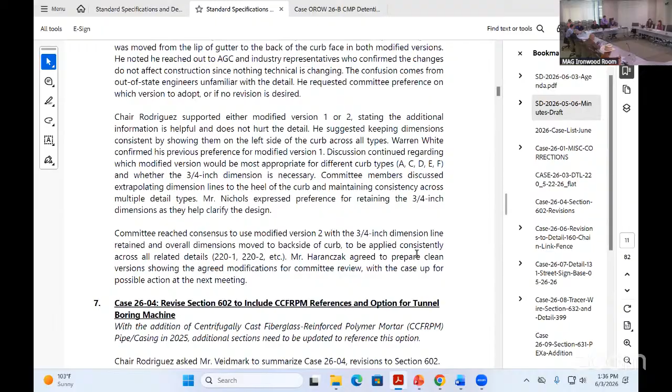All right, we'll jump right into agenda item number 3, which is going to be the approval of May 6th, 2026 meeting minutes. Gordon's going to pull those up. Hopefully everybody's had an opportunity to review the meeting minutes and any corrections they may have had, they got with Gordon. If not, now's the time to do it. Do any of the committee members have any questions, comments, or notes to the meeting minutes? All right, hearing none, is there a motion to approve the meeting minutes as written?

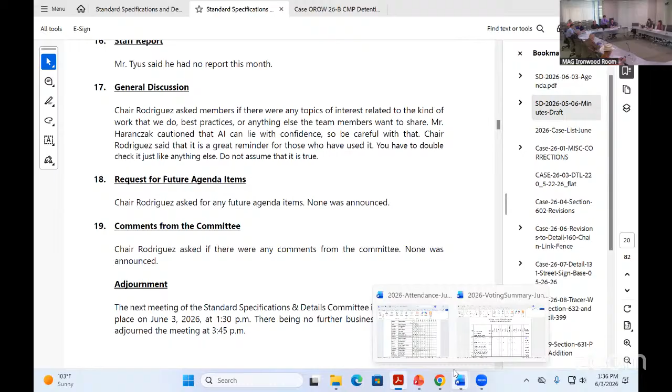This is Roy, City of Scottsdale. I motion to approve them as written. Thank you, Roy. At this time I'll take a second motion. This is Marty Robbins from MCDOT. I'll second the motion. Thank you, Marty. I appreciate that. With that, we'll move into a roll call vote.

Thank you, Chair. Let's just roll right down the list here, starting with ADOT, Avondale. Rob, are you filling in for Jim today? Yes, can you hear me now? Yes. Okay, yes, I'm filling in for Jim. Thank you. And as far as the minutes, do you approve the minutes? Yes. Okay, thank you. Buckeye? I think Buckeye is not here. Chandler? Yes. Thank you. El Mirage, yes.

Florence, Gilbert, yes. Glendale, yes. Goodyear, yes. Maricopa County, yes. Mesa, yes. Peoria, yes. Phoenix. Miguel, do you want to cover for Jose? Scottsdale, yes. Surprise, yes. Tempe, Tolleson, or Youngtown. I don't think any of them are online. So otherwise, looks like the motion passes unanimously. Thank you, Gordon. Miguel, are you covering for Jose during his absence? For City of Phoenix?

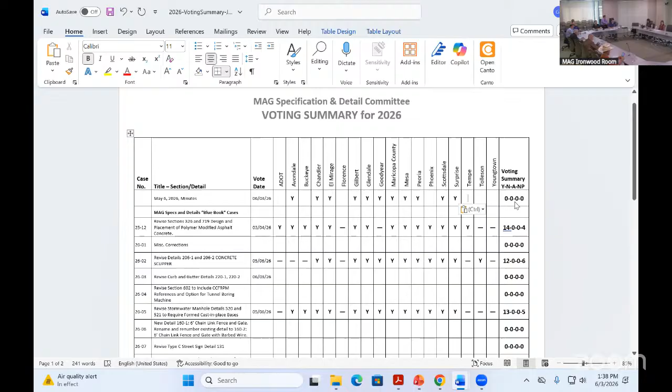We're gonna move into agenda item number 4. This is a presentation on ductile iron pipe, V-Bio polyethylene encasement and zinc coated pipe. As you know, this presentation is gonna be brought to us by the US Pipe Group. It really just includes standard recommendations and practices that are across the ductile iron pipe industry. I think that's fair to say.

And then also, as with anything, if you take anything out of this, we're looking for longevity with anything we build. And this is just to help with that longevity portion, kind of bring awareness to the group. So with that, I'll give the floor to Connor for the presentation. Thank you, Conor. Thank you very much.

Yeah, first off, thanks for having me here, of course. I'm excited to talk about this. A couple minutes about me. Been at US Pipe for about 6 years now. Before that, I was in the oil and gas industry, all focused on corrosion control, so tanks and pipeline. So got quite a bit of background in the corrosion side of things. I'm the research development manager for US Pipe. So always looking at new products, new ideas, new concepts, and anything in between.

So just jumping in, I always appreciated this slide when I first started with US Pipe. This was the first real discovery of polyethylene encasement back in 1951. And at the time, it was a bolt study. So back when we had mechanical joints before the push-on joint, there was a lot of bolt corrosion, and DIPRA and other pipe companies were looking for solutions on the bolt side of things. And this was right when polyethylene film was first being developed through DuPont and some of the other chemical companies. And we said, well, maybe we should put some on the pipe and see how it works.

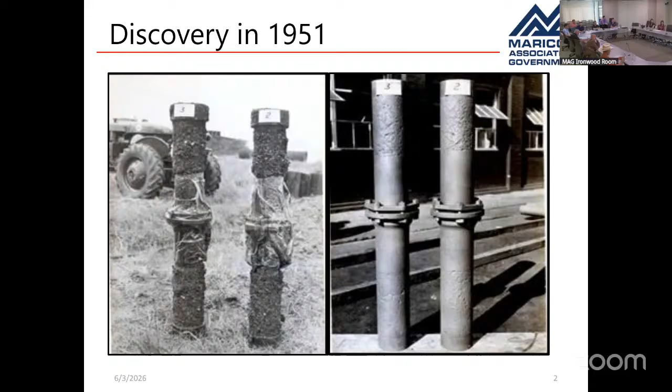And really clearly from the picture, it wasn't just the bolts that it protected, but a big portion of the pipe as well. You can see where the polyethylene encasement stops on the top portion and the lower portion, it prevented corrosion on the exterior. So of course, from these results, everybody got very excited. And the first commercial installation was not too far later. It was 1958 on an operating water line. And luckily, we still get to go to that water line. It's in Lafourche Parish, Louisiana. So very corrosive soils. And that water line is still active, still in service.

And DIPRA actually goes back about every 5 years or so. You can see the dates on the bottom. And they dig a new portion, excavate a new area of the line, remove the polyethylene encasement, make sure the line is intact. They sound the pipe to make sure there's no external corrosion. I actually got to take these pictures back in 2021. And then I believe 2026 is coming up. We might end up being in 2027, but that's out of my control.

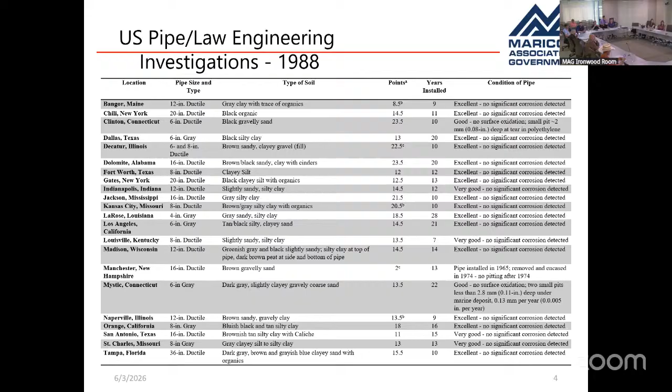So of course, from there, this is US Pipe. We went around the United States and looked at different active water lines that had polyethylene encasement wrapped around the pipe, and hired an independent engineering firm. And in all of the cases, the pipe looks excellent. This was done in the late 80s. There's another group in the early 90s. You can see there's some ductile, there's some gray, various locations. I'm not going to go through each and every single one. But the point being, these are all 15, 20 years at the time, and looking in great condition in very corrosive soils.

Of course, a lot of people always ask, how the heck does polyethylene encasement work? And the biggest answer is the dissolved oxygen is depleted in between the polyethylene encasement and the external surface of the pipe. And oxygen is a major driver of corrosion. As soon as the dissolved oxygen drops down, the corrosion rate follows it. So there's a paper in 2010, ASCE Pipelines, written by Schiff and Associates, who later became HDR Engineering, which a lot of us know. And that's the reference there at the bottom.

But a little bit more about that. That was a circulating water flow loop in a closed system. And there were corrosion probes on the pipe surface, as well as dissolved oxygen meters. So that's what that graph shows, the dissolved oxygen after a period of a few days dropping down to a point where there's essentially no more corrosion.

In addition to lab studies, we do a lot of field burials. So US Pipe owns a test site down in the Florida Everglades. We try to look for the most corrosive soil we could. We used to have a test site in New Jersey back in, I think, 57, which is where a lot of the infrastructure started in the Northeast. And that is now a protected wetland. So we had to buy a new site back in 2001. And we do a lot of field studies of actual pipe in the ground, mainly focused on different methods of corrosion control.

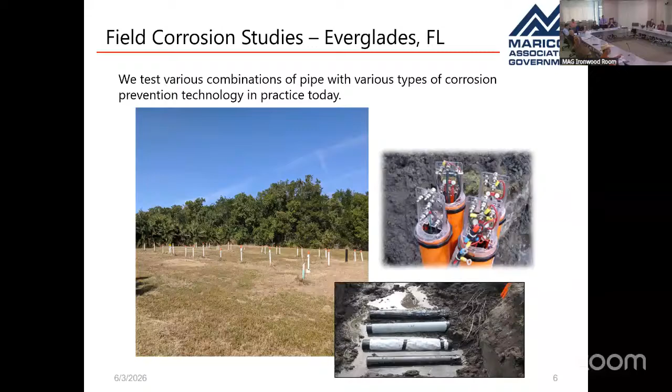You can see the test stations that are coming up out of the ground. We can do various monitoring techniques to see how they're working. So because of all that research on polyethylene encasement, we found that there could be a better polyethylene encasement. How do we make it better?

One of the major issues in some of the coastal soils can be microbiologically influenced corrosion, or MIC. It's not too common outside of coastal areas, but there are some swamplands, some bogs and things where you can find it. And it thrives in an oxygen-depleted condition. Of course, that's our major mechanism for preventing corrosion, to consume the oxygen in between the polyethylene encasement and the pipe. So there's the risk of MIC corrosion. That's why we added an antimicrobial to the film surface on the ID.

So it's a 3-layer film. There's an outer layer that has UV stabilizers in it. It's white, so it's good to see if there's any damage to the wrap as it's going into the ground. It's very visible to see the black pipe underneath the contrasting white. Then the intermediate layer is a 6 mil thick polyethylene, and then you have the inner layer that has the additives, an antimicrobial and a corrosion inhibitor.

This product is available. It's not proprietary to any manufacturer, and it meets all the requirements. AWWA C105 is the standard for polyethylene encasement, so all of the physical performance and physical properties of the product are in there.

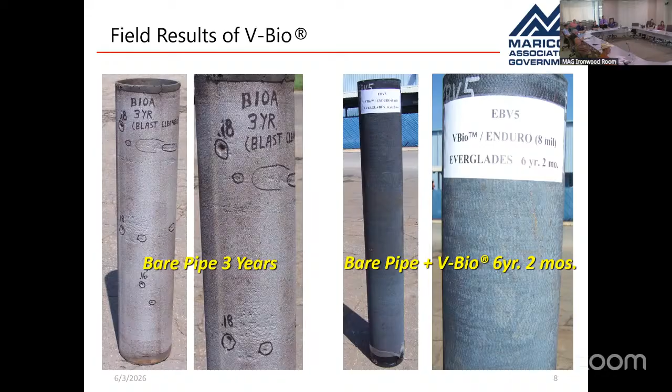Here's a great example of how it does work. We've got bare pipe on the left, 3 years. It says 0.18. There are some other penetrations, but that's about 3 years in Everglades soil. So we can get a hole in a 1/4-inch wall pipe pretty quickly, which is unfortunate, and that's what we're trying to prevent and stop. There's VBio on the right. At the time it was 6 years, and we still have a whole bunch of pipe and examples of it.

In addition to VBio, out of all those corrosion test site studies, we also evaluated zinc coatings. Zinc coatings have been used for a relatively long time. We started, I think, in the 80s, and the ductile iron or cast iron pipe manufacturers in Europe were using zinc a lot earlier than we were. What we found is the combination of the two, zinc and VBio, or zinc and polyethylene encasement, works tremendously well. I got to take these pictures a few years ago; this is 10-year-old pipe down in the Florida Everglades.

We also do intentional damage to the polyethylene encasement to simulate a contractor's unrepaired damage of the poly wrap. And you can see in the pictures below there's no corrosion. That's 10.5 years of that pipe being in the ground.

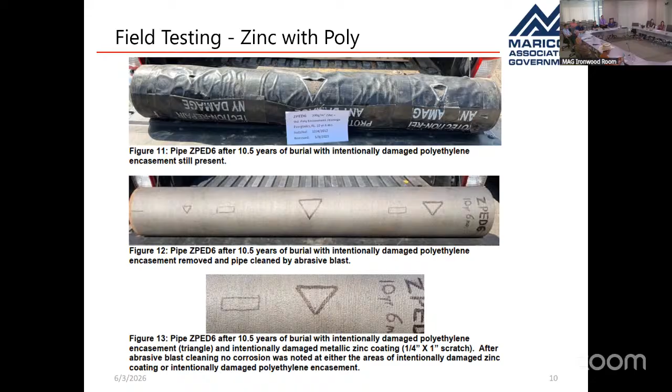In summary, we presented at AMPP, the Association for Materials Protection and Performance. It used to be NACE, the National Association of Corrosion Engineers, which is the national and international organization that has all standards related to corrosion control. They're the go-to source. We presented, I think last year, maybe 2 years ago now, a very large data set from a whole bunch of pipe.

So not quite in conclusion, but a summary of zinc and VBio, just to really drive it home. We always recommend VBio or polyethylene encasement with zinc. We never recommend zinc pipe alone. We found the combination of the two is really the best bang for the buck.

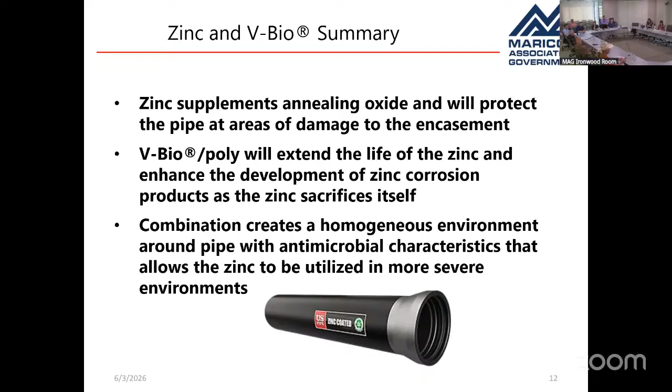Back in, I want to say the early 2000s, DIPRA and Corpro, DIPRA is the Ductile Iron Pipe Research Association, came together and put a lot of data together to come up with recommendations for corrosion control of ductile iron pipe. It went back and forth for maybe 5 years. It was proprietary to Corpro for a few years. And then I want to say in 2014 or so, they released it to the public. So anybody can use this. It's on their website. And it really is a risk-based approach to corrosion control.

So there's a consequence and a likelihood. So those are kind of the two factors. When you get consequence, we have thoughts of, how big is the pipe? How deep is the pipe buried? Is there alternate water supplies, or is this just a single line, feeding a hospital of some sorts, right? So that's where a consequence would get a higher point count. And then the likelihood side is more related to the soil, right? That's what we're concerned about, is aggressive soils. And there's point counts on that as well.

I'm not going to go through each and every parameter here. I only have a few more minutes. But one of the main points would be soil resistivity. It's one of the major factors or parameters of soil that we look for to determine if it's corrosive or not. So you can see on the right, there's a point count there. So 30 points goes to resistivity versus some of the other factors have quite a lot less point count. And you take soil samples along the right of way, or maybe there's some historic data, and it can give you a great indication about how aggressive the soil is.

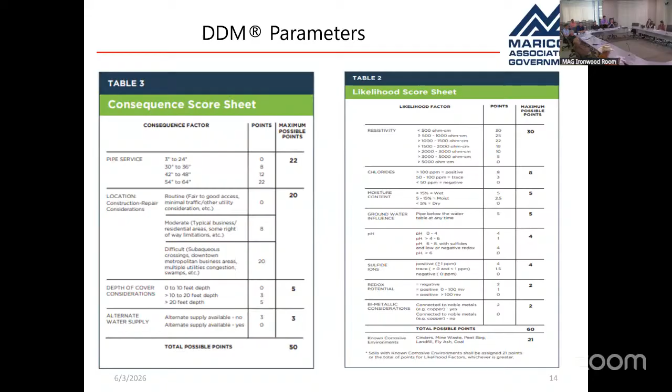And then from there, you add up all your parameters, add up all your points, and you wind up somewhere on this chart. So there's 5 categories here. I tend to look at it as 3. But number 1, being standard pipe, we know that not all soil is corrosive. We know that we have ductile iron in the ground for decades and decades. We know we've got gray iron in the ground for over 100 years, over 150 years. So there's quite a lot of evidence to support that not all soil is corrosive to ductile iron.

As you move on, we go into number 2, which would be VBio. The DDM only covers VBio as a recommendation. And then number 3 would be joint bonding, which is not a recommended practice for us. For me, US Pipe, there's a lot more consequences that could come with bonding the joints of ductile iron. And then 4 and 5 would be the severe categories where that's zinc and VBio in combination.

So here's the recommendations. You can see, like I said, number 1 is standard pipe. 2, we have VBio. Number 3 is VBio with joint bonds as a possibility, as an option. And then we have 4 and 5, which are very similar in my mind. We're actually talking about combining those two sections just because they're so close. The only difference on there, as you can see, is a product called Life Extension Cathodic Protection. I've not seen that used in practice at all anywhere. So we're probably going to scratch that off. But for now, that's what the recommendations are.

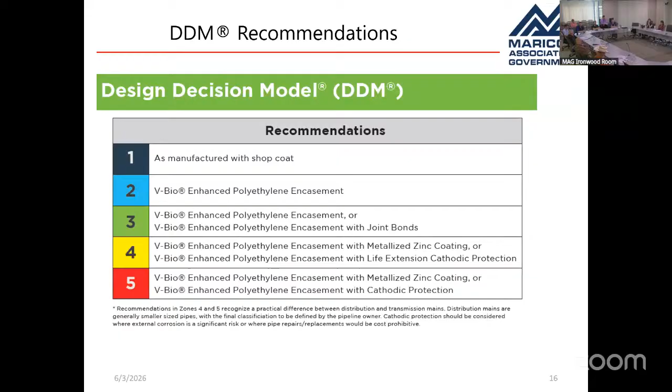There's quite a lot of content there, but I appreciate the time. So any questions, please. Thank you, Conor. I think it's helpful for a lot of us that use ductile iron pipe, Glendale included. Obviously this presentation, although US Pipe would prefer, it's not to persuade anybody from one product to the other. It's more to give us an understanding, those that use ductile iron pipe, on what the different methods are. And the DDM, I think, is a great tool.

And that's available where? On DIPRA's website? Yes, it's on DIPRA's website. I want to say all the pipe manufacturers probably have it on their website as well. But I think a simple Google search of design decision model or DIPRA, but it's definitely on DIPRA's website.

Absolutely. One of the good things we have going for us is the majority of our pipe in the valley is bedded in ABC, more of an inert material. That's helpful. Doesn't necessarily always help with the electrolysis if we have something that's not wrapped properly, which we crossed that bridge last year with the wrap and tap detail. But corrosion protection is always a concern, especially for us because we use so much DIP and we have so much in the ground. When we replace transite, we replace it with DIP.

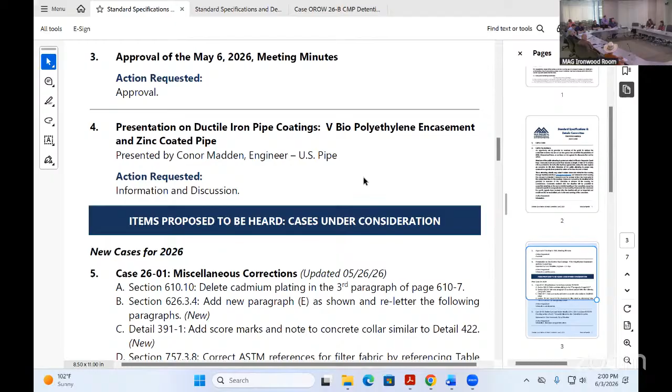Anybody else, any other committee members have any questions for the US Pipe Group? So, all right, well, I will end this with, I've dug up and witnessed what happens when pipe's not polywrapped properly and it leaks. We have a lot of it in the ground. We'll continue using polywrap without testing soil and with testing soil. So it's still a BMP for us, or a best management practice. And I would encourage others to consider it.

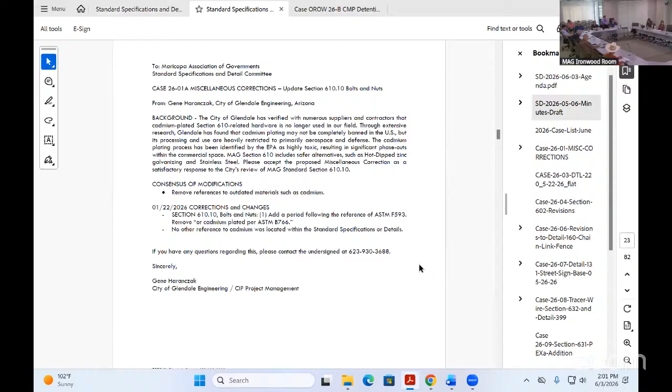All right, moving into items proposed to be heard and cases under consideration. This is new cases for 2026, agenda item number 5. Case 26-01 is the miscellaneous corrections. We have one existing one that was A for the cadmium bolt plating, but then there's a couple new ones. We have B, C, and D. I haven't had a chance to go over B, C, and D, but who brought B to our attention?

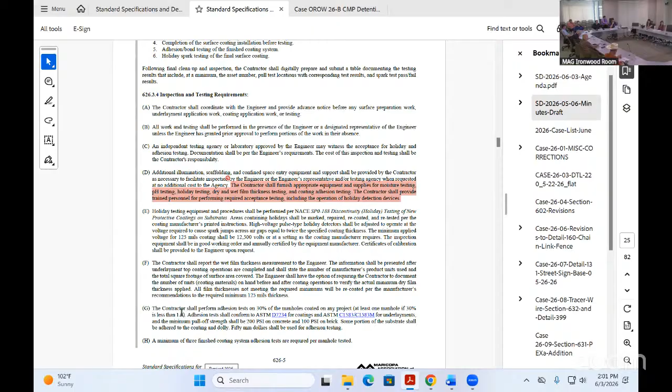This is Gordon, but the case was brought to our attention from Phoenix, from Rob, who basically just noticed as he was going through their supplements that on their supplement, and this is a section that was based on the Phoenix supplement, this should have had the letter E as a separate paragraph, and then the ones that follow should be relettered. So it's just a formatting issue. Okay. Thank you, Gordon. And then C?

This one was brought forward by Jim Badowich. This was discussed in the Water Sewer Working Group. And the idea is to add the score lines to the concrete collar on this detail, similar to the, I think it's 422, I can't remember exactly, the detail for the manhole cover. Yeah, I know we've been going through and correcting a lot of those and adding them. These are across multiple details. Thank you, Gordon. And the last one for D.

This last one, I noticed as I was going through the spec that a couple of these ASTMs were out of date or incorrect. And I brought this to the attention of our outside right-of-way group. And I think Peter can give an update on his research. Thank you, Gordon. The existing section for landscaping identified a specific set of designations for basically the filter fabric to be utilized. We already had filter fabric requirements in section 796. So upon discussion with the group, we decided, why don't we just reference the table in 796 and avoid duplicating requirements for filter fabric. It was already in the standards.

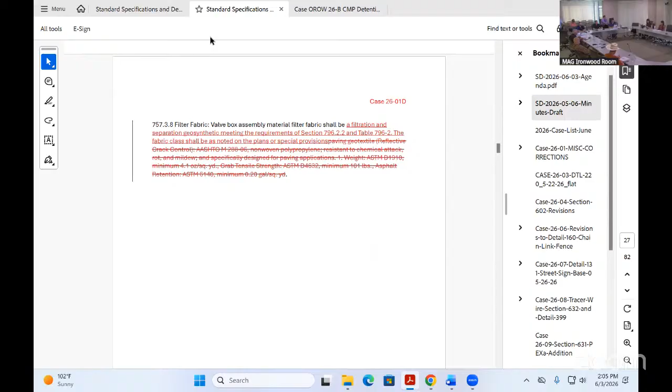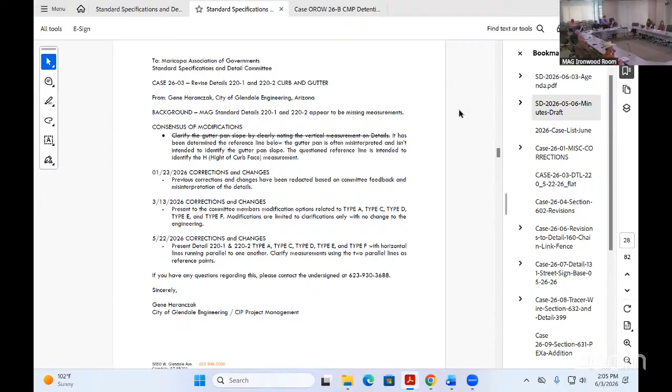All right, we'll move into agenda item number 6. This is case 26-03, revised curb and gutter details 220-1, 220-2. So the latest and greatest came out last month on the 22nd, and this was just to present the details, type A, type C, type D, type E, and type F, with the horizontal lines running parallel to one another, and clarify the measurements using those parallel lines as reference points. Nothing technical has changed on this drawing other than clarifying the notes and or clarifying the measurements and moving them into different locations.

Now, where I was at with this is in the blue. The question comes in, you look at where it says remove sidewalk note question mark on the lower blue note. There's a little depiction of a very steep angled sidewalk on the back there, and it notes sidewalk. And then there was the same depiction on the upper one where it says sidewalk note was removed. So I just wanted to get an idea from the committee members whether we should just go ahead and clean that up and pull that out of there on both details. I don't see a reason for it, being that sometimes we have landscape back there, sometimes we have sidewalk. I just thought it would clean it up a little bit. But those are the updates, and with that, I'll open it up to the committee for discussion.

Mr. Vice Chair, I agree with removing the note. Okay, so it'll look a lot like the top one, without the red cloud and the blue writing. So there was a measurement that changed, and it was because it was corrected. Which one was it? I believe it was mountable curb and gutter type F. It called out 1 inch where the red line is, and it called out 1.25 inches on the bottom. But the trouble with that was that if both lines are perfectly parallel to each other, by default, if it's 1.25 inches on the bottom, it's gonna be 1.25 inches on the top.

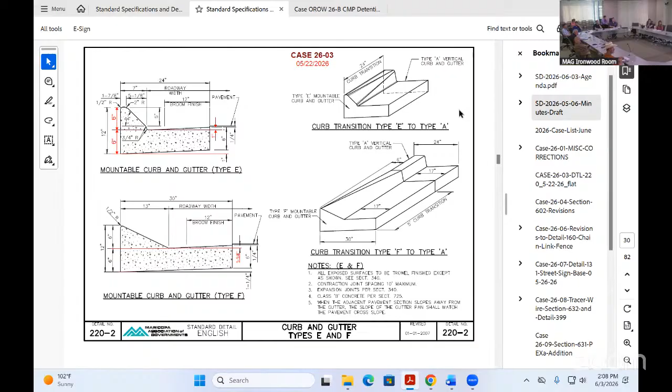But I think the confusion came in because that red line that's drawn through type F, the upper parallel line, was not necessarily intended to identify that measurement. That's what was causing the confusion, because it didn't go all the way through. So you didn't know where its pivot point was. You didn't know if it was perfectly parallel to the lower line. But I hope everybody's had an opportunity to look through this. I know it came in mid-month. It is up for possible action the way it's drawn right now. I'd have to remove the blue and the little red cloud. But first, let me see if any of our committee members have any questions or comments on it besides Ryan.

When you're removing the sidewalk note on type D, are you also going to be removing the dashed lines? Because those look kind of strange at that angle anyway. Yeah, they were a mirror image up on top on the upper type C. It was the same thing, and I pulled it out, and that was one of the questions I wanted answered, was should I just remove it from both?

So this is Roy from the city of Scottsdale. Would we want to do the same thing for the type B? B as in boy, ribbon curb, the call out for the parkway or sidewalk on the left? Just take that call out as well as the dashed line in the bottom there. The dash line on the bottom. Oh, I see what you're saying. Yeah, and really that parkway, I know when we do our parkways, we like to leave them recessed no more than 1 inch, which there's no measurement called out in there. But yeah, great point, Roy. Any other committee members have any questions? Anybody haven't had an opportunity to look at this detail?

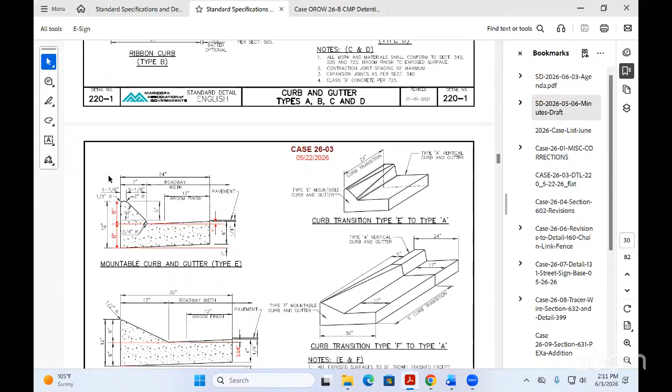Hey guys, it's Rob Godwin for Jim. Just want to bring something up. You may be aware some contractors this past year are starting to pour integral; we've got integral curb, gutter, sidewalk with the roll curb. Now they're doing it with vertical curb. So now we've got monolithic vertical curb and sidewalk.

I don't know if that's a place to have a note here or not, or that should be a different detail at some point, but when you have the sidewalk drawn the way it is, you're looking at 4 inches thick. But when it's poured monolithically, it's more like 6 inches thick, and it tapers up to 4 inches. Well, I guess my question would be, is that a problem or a concern? Are you guys seeing any warranty issues or any premature failure due to that?

No, I mean, personally, I think it's better to do that. Streets Department doesn't like it. They've got to get bigger saws where they've got to cut out the sidewalk portion. But I'm just saying the way that it's drawn here, when you show sidewalk, it would be 4 inches thick if it's poured separately. If it's monolithic, it's going to be thicker.

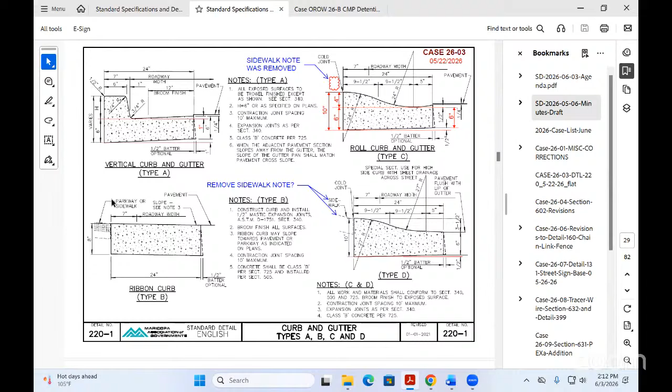Yeah, gotcha. I mean, I'm not opposed to thicker, right? Oh, sure. Right, but I'm just talking about the way that it's drawn. If you note that the sidewalk's there, it's gonna be different if it's monolithic or if it's poured separately. Well, what I already heard from two other committee members is let's just pull the reference of the sidewalk out. Yeah, that would make sense. Okay, you'd agree with that? Yeah, sure.

All right, like I said, we'll keep this up for action for next month, and I'll get a cleaned up CAD version since I'm not getting any opposition to it and getting some good positive feedback.

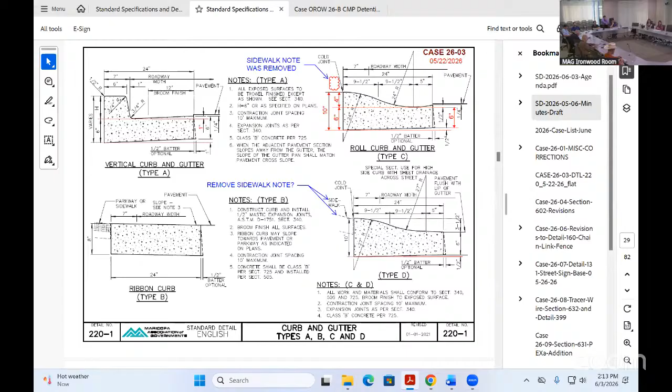All right, let's move into agenda item number 7. This is case 26-04 to revise section 602 to include the CCFRPM. That's a mouthful. This one's brought by Arvid. Do we have Arvid online today? I don't think Arvid is online, nor is Jim Badowich. I did get an update to his case.

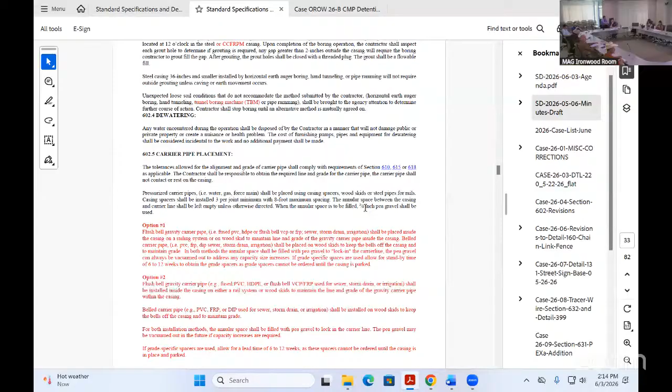The only thing that changed is based on our discussion at the committee last month about the different options for the pipe support, whether you're using pipe supports or railings or wood skids. He wrote a couple options, option 1 and option 2. They're very similar, trying to describe what the preferences and options are, but they're just formatted differently. So it's not intended to duplicate it. It's more like take a look at these two options and tell me which one you think is better, or if you have any other suggestions or changes you'd want to make.

So it's not necessarily to include each option in the publication, but rather for the committee to choose an option. Is that what I'm hearing, Gordon? Right. Yeah, it's similar information, both options. It's just what do you think makes it clearer? Got you. This one I haven't had a chance to dive into either yet. I was hoping that Arvid was online. I'll have to get into the next water sewer working group and catch up on it. So this one was for information and discussion, was not up for action. So I'll open up any questions or comments from committee members.

Centrifugally cast fiberglass reinforced polymer mortar pipe casing. Okay, hearing nothing from committee members, we're going to move. Oh, I'm sorry. Sorry about that, Mr. Chair. Roy, City of Scottsdale, just a suggestion possibly for option 1 and option 2: since it's referencing the carrier pipe support, maybe that becomes 602.5.1 Carrier Pipe Support, with a subtitle for whichever option is chosen, so that it's understood by all that are reading it that it's specifically for the support of the carrier pipe.

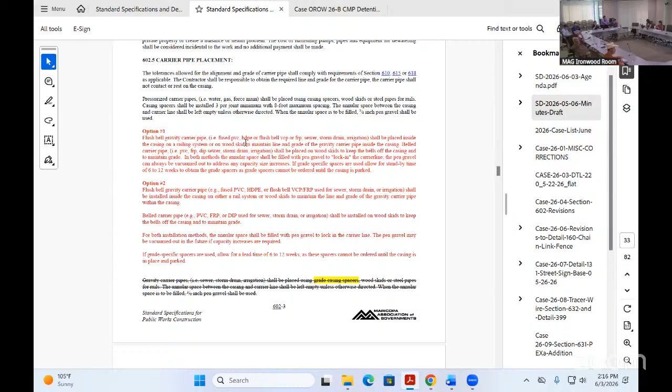Yeah, placement, and then you would have a subsection or a separate one for support. I think in the working group discussion, Arvid was hoping to get some feedback on this part and kind of make a determination which one to go with, and then have it up for possible action next month. So if you have any final thoughts on it or preferences, maybe you could forward them to me or Arvid.

Yeah, I'd encourage all committee members to run through it, and especially those that are subject matter experts or have a lot of experience with this application to put pencil to paper, make some comments and get them over to Arvid, Chair Jose Rodriguez, and Gordon.

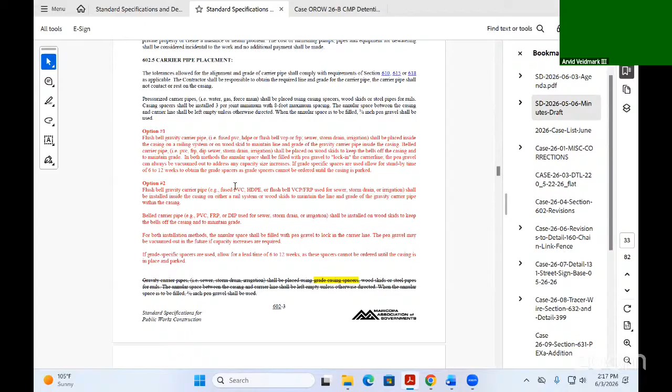I apologize. I just logged in too. If there were any questions I could answer. Did you catch the comment on carrier pipe support subsection there for 602.5.1 is what was being suggested? Yes. And I actually had a more current draft that I just sent to Mr. Gordon that we could look at after our last working group meeting. That's a little bit cleaned up and reduced down. I don't know if Gordon can pull that up real quick. I just emailed it to him.

We'll get that up. Has that been up? Was that one updated on the site, Gordon? Okay. Well, we'll get it updated on the MAG website and get it recorded there. Okay. Yeah, I definitely took the feedback from the working group and we really tried to just thin it down to be as descriptive and accurate as possible of the two different options. And then have a collector paragraph at the bottom that talks more about the grade spacers if they're selected.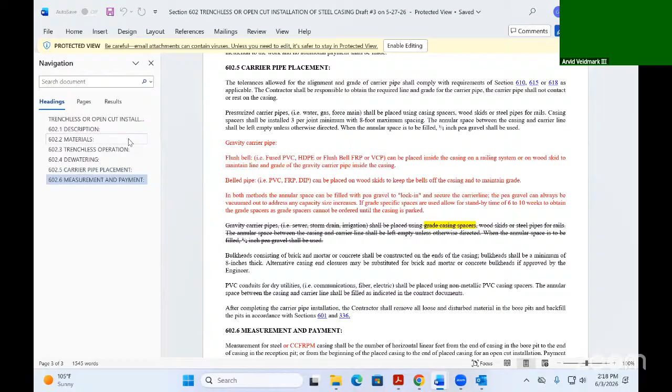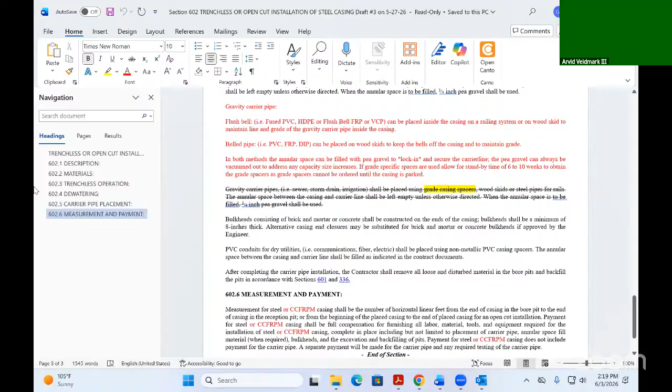Gordon just pulled it up now. Yep, there it is. And again, we're talking specifically just about gravity carrier pipes inside casing. We're not affecting anything to do with pressurized carrier pipes, because that pretty standardly is using casing spacers in most applications. Okay, would there still be a need for another 0.1 section, you think? I mean, I kind of like that idea. It's completely up to you guys. The way that this is now presented, it's cleaner.

And where you can see the old language that's stricken out below the red, that's what used to read. We've just expanded it just a little bit because we do have two distinct gravity carrier pipes that go through casings in the industry. We have belled and flush bell, and they both are unique. And so that's why we did the flush bell, the belled, and then the closing paragraph, that third red paragraph there, talks about the lead time on the grade spacers if those are selected.

Okay, thank you, Arvid. And I always defer to Gordon when it comes to the numbering if he believes there needs to be something. But the whole 602.5 carrier pipe placement is all typically one category. And Gene, to your comment that we had last month about the brick and mortar, that is in there. The bulkheads consisting of brick and mortar or concrete shall be constructed on the ends of the casing. Bulkhead shall be a minimum of 8 inches thick. Alternate closures may be submitted for brick and mortar. We don't mention the rubber end seal, but we could put that in there if you guys wanted to add that also. But it needs to go over a brick and mortar bulkhead or a bulkhead of some sort that's structural.

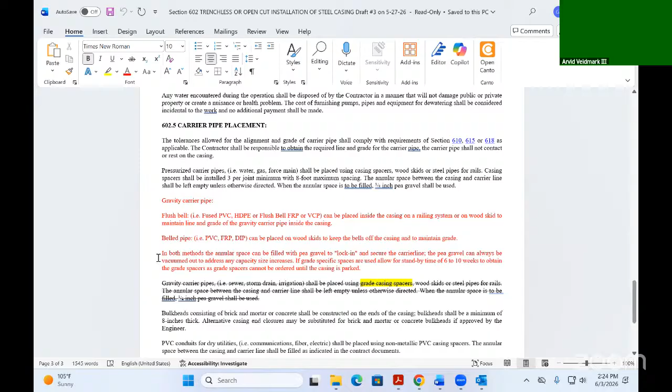After the discussions in the working group, it was, let's try and get some language in there of some sort that provides more of an educational understanding than more of a specification. So to your point, it's a little bit odd because it doesn't follow the standard go, no go, do this, don't do that. And I think Jose made a comment that there was a concern about the word shall, and so we use the word can instead to provide some flexibility. So again, what you all want to agree upon is what we'll do, obviously.

And so I'm just taking a stab at what I've been presented with from various comments, because it's such a unique topic. When it comes to this specific item, it was felt like it needed to be a little bit more broad, which is what you saw on the original draft that was just presented. And then this one that I just did an update on as of the last working group was nicked down to this amount now, and it can be changed depending on how you see fit to make it work.

I think in 10 years, when somebody asks the question, why do we put this language in? We're going to all rely on Peter and his notes. I brought the boxes home, but yeah.

So again, it's unique in the sense that it is a little bit more explanatory than other language has been, but it's what I've been getting feedback on, because once there's an understanding of the unique nature of what's attempting to be done here, it's not an everyday thing. In most cases, speaking openly, most people don't deal with this day in, day out. They deal with it once or twice every couple of years, so it kind of gets forgotten. And so it's really there just to help provide an educational understanding of why the language is in there.

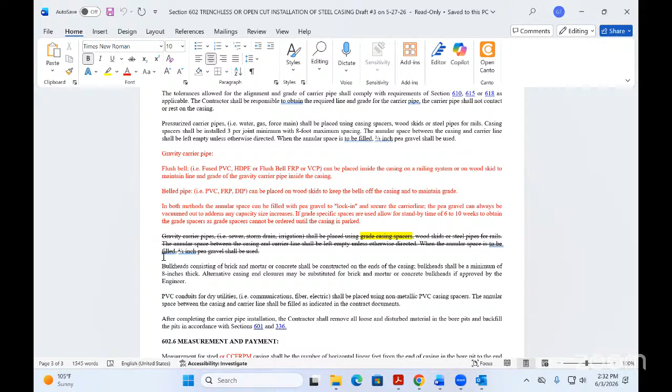And this is Roy, City of Scottsdale. I agree with Gordon. After reading all of this, the paragraphs above and the paragraphs below the new information deal with spacing as well. So to try to specifically identify the new stuff as support, I don't think is good. So I withdraw my comment. Yeah, let's still run that through the working group though, just to double check, make sure everybody gets a chance to look at it here and at the working group, and if we want to subcategorize it, but it is a relatively small section.

All right, any other questions? Go ahead, Arvid. No, I said I'm good. Thank you. Thank you. Any other questions or comments from committee members?

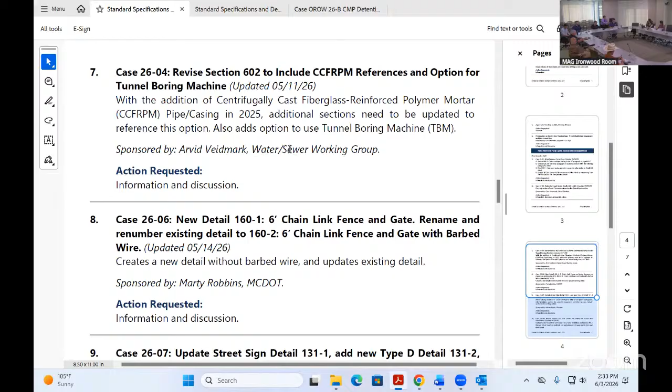All right, hearing none, we're going to move into agenda item number 8, case 26-06. This is for new detail 160-1 for the 6-foot chain link fence gate. Rename and renumber the existing detail to 160-2. This is brought by Marty. Marty, do you want to provide an update on this case? Yes, I can. This is Marty from MCDOT.

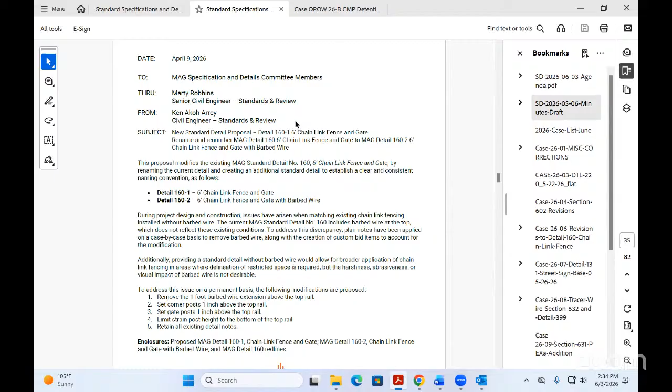Okay, so we wanted to create a detail without the barbed wire. The existing one has barbed wire, so that was the reason for the update. So as you scroll down, I can provide the update. I think get the latest. The comment last time was to add a gate clearance, bottom of the gate. There you go. Okay, so see note 8. So we added that note 8 and the comment to provide a 2 to 2.5 inch clearance under the gate, and gate can move freely.

I thought that was a good comment. So there's no issue with that. So we did make that update. I don't know if anybody had a chance to take a look at that or is okay with that update, and if they have any other comments or questions regarding these details. Other than that, I'm good. So the only thing we did is that we wanted a detail that did not include barbed wire, but the existing detail is showing the barbed wires. So we just revised the detail number and naming.

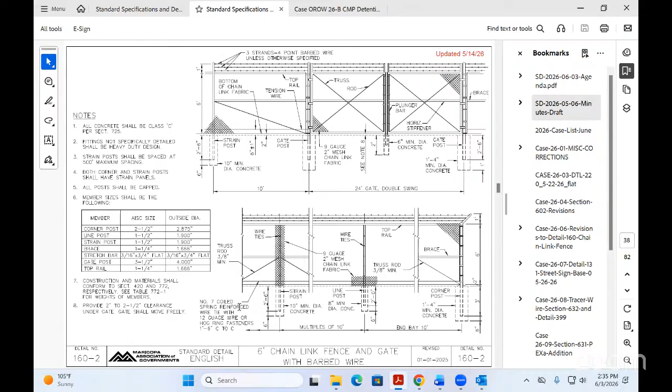It looks like you added the note 8 on this one as well. Yes, yeah. So we did it on both details. Kind of a lot of information is duplicated for each one. One of the thoughts was if we could just say optional for the barbed wire, but we thought that might be too convoluted. There's a lot of stuff with respect to that top bar for the barbed wire. So I don't know if anybody had any thoughts on that.

Well, that was going to be my question, Marty. Maybe I missed that at the last meeting if we had that discussion. Why wouldn't we just use the one detail and note it as optional? Yeah, as optional. Can be used with or without barbed wire. We could go back and discuss that internally here and see if we can get that to go. We just thought that might be too much information, too many points being called out to be optional, optional this or optional that. But we can specify in a note that the barbed wire is optional. So we can go back.

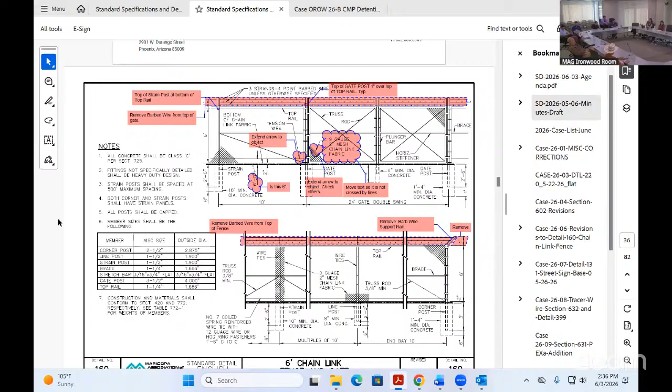You start getting into those vertical posts. I see what you're saying. For the optional, you have to extend the vertical posts up so you can tie the barbed wire to it. And yeah, that was the primary reason for doing the two different details. And we did look at the ADOT details. ADOT has two different details for barbed wire and non-barbed wire areas. All right. Thank you for the update. Any committee members have any questions or comments on this case?

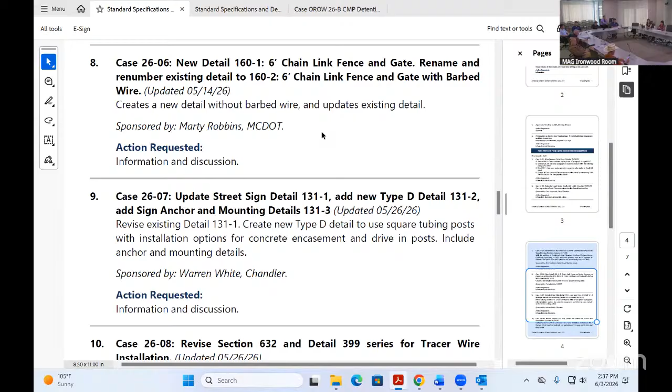Marty, if we're not hearing any more comments and we don't make any changes, can you provide a clean version of this so we can put it up for action? I think this actually is a clean version. I was gonna say, yeah, this is actually clean. Oh, that is the clean one? Okay. Yeah, and I can run it by the team and find out what it would take to make it just optional. But as discussed, I think there'd be too many optional points to call out.

Okay, I got confused with having the initial detail as I was going through them. I see what you're saying now. It is the clean version. Thank you, Gordon. Thank you, Marty. Let's put it up for action for the next meeting. Are you comfortable with that, Marty? Oh, absolutely. Yeah, let's do that. And then that'll give committee members this whole month to review it and provide any comments prior to next month's meeting. Thank you.

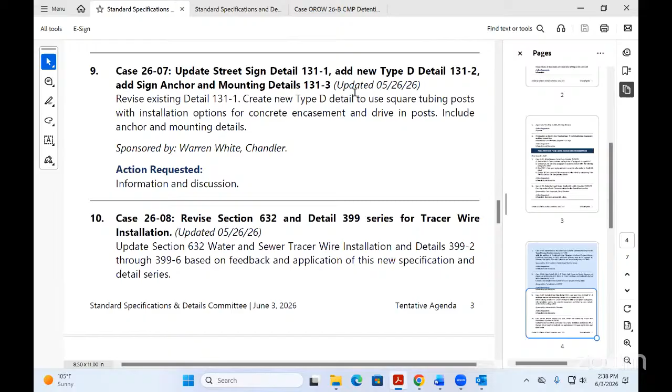All right, any other comments or questions from committee members on this item? All right. Hearing none, we're gonna move into agenda item number 9. This is case 26-07 for updating the street sign detail. I know our team, Glendale's team, has provided quite a bit of feedback. Warren's not here, but we do have our substitutes that'll help us with any of the recent modifications and changes. Floor is yours.

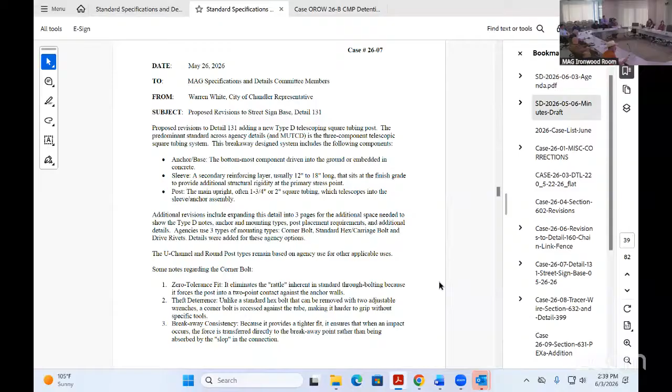Thank you. There's at least 8 different agencies that have a detail for the square post or type D, including Chandler. So we've tried to consolidate as many as possible on that third sheet on the detail. Scroll down a little bit more. There you go. We still have a little bit more drafting to do for the sign mounting, and we'll also need to add a detail for the U-channel sign connections. But we've tried to capture the different agencies' bolt placement for their square posts as much as possible in this detail.

Yeah, there was a couple different options with that corner bolt and all that. Some stuff I hadn't seen yet. The different mounting styles. You guys really incorporated a lot into these. Again, we still have some more drafting to do. But it does meet our needs at Glendale. It does capture those needs.

Will the street sign base 131-3, type B and C sign mounting on the bottom left-hand corner, is that the additional drafting you're talking about? Correct. We just put a snip in there for now to give everyone an idea of what we're working on. Perfect. All right. Open it up to committee members for any comments or questions. I know a lot of people have been giving Warren feedback as it's been going.

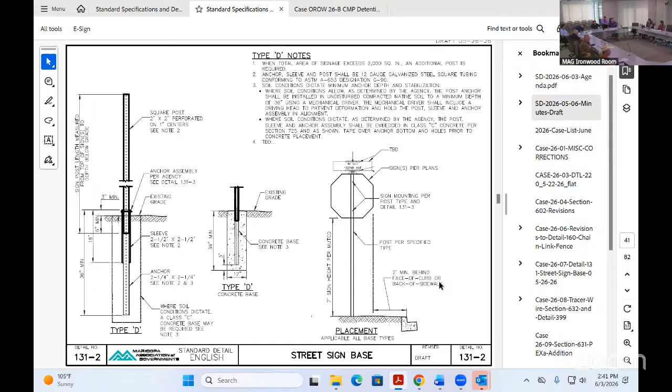Mr. Chairman, I did have one question. So each of the details have the same title to them, the street sign base. Would this be the thought, this is continuing information from page to page? Correct. Okay. Typically, we try to get it to where each, if it's a -1, -2, -3, has a different name associated with it. So there may be some way to consolidate specific information on one, the next, and the next. Understood. We can contemplate that. It just makes it, when you look it up, it's easier.

So you slightly modify that title a little bit, huh? If you look at most of the details, you don't see the title on each. For example, you could make it street sign bases type A, B, and C for the first one and so on. And maybe the last one would be street sign mounting details or something like that. Great observation. We can do that. When you look at the index, you're trying to find these things, you go, what are these three? Now it dawns on me, I wasn't paying attention to it until you brought it up.

So the first one could be street sign base type A, B, and C. Yep. The second one could be type D and placement, and then the third one could be anchor assembly and mounting types. Yeah, it could be as simple as that. Yeah, when you look it up in the index, it would make it a little easier.

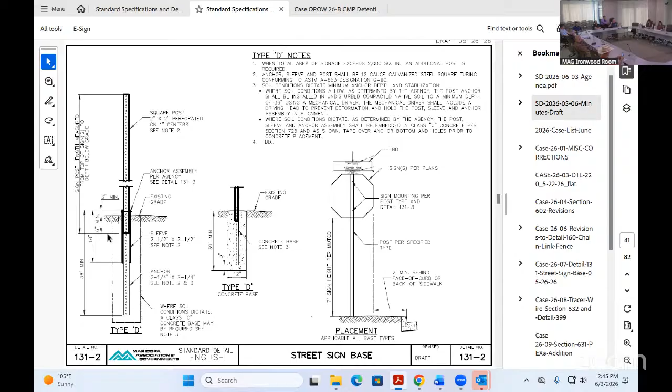A good point, Brian, though, to make sure that all the signposts meet it, because I don't know if type A does meet the MUTCD. No. I know ours do because we use the square type D for the breakaway. We'll verify that in the next meeting. Thank you. Yeah, or even the pipe, if the pipe meets it, because if it doesn't meet it, why even have it in there?

Is the type A, B, and C, did you find other municipalities are using the A, B, and C, or was that just kind of the default, which was in MAG? I'll have to clarify that with Warren. I believe that there are agencies that use it, I just don't know which one off the top of my head. Yeah, I'm curious because there is not a real designated breakaway on those. Maybe part of this would be, if there are agencies doing this, providing those recommendations back to that agency, and maybe those should be in their supplements. That's right, especially if they're not meeting the MUTCD.

It gives you a little bit of homework. We sent you home with something.

All right, any other questions or comments from committee members? All right, we do have another agenda item, number 10, which is case 26-08 to revise section 632 and detail 399 for tracer wire installation. This one too is brought by Chandler. You want to provide an update?

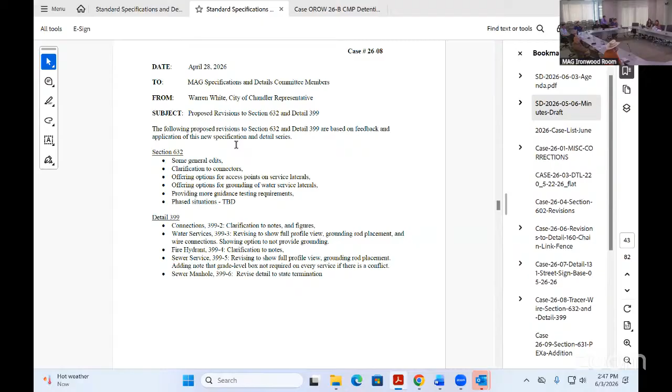Yeah, absolutely. So my name's Katie. I'm one of the engineers working on this case with Warren. The main updates we've made so far are mostly to the spec section. We're still working on the CAD details to update the detail. Gordon, does it have the marked up document below? Perfect. So some of the main updates are making it more consistent with how we're calling out the connectors, using main line to service connector throughout the document.

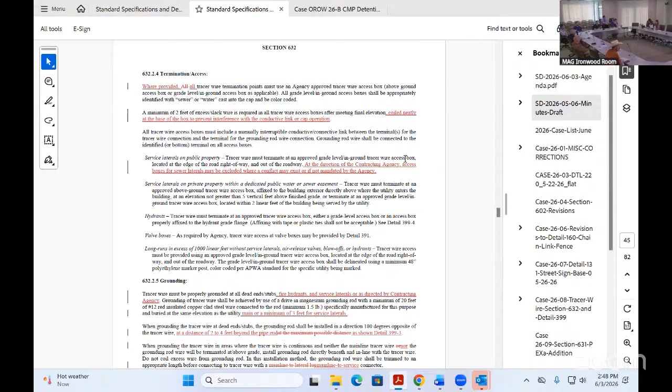We also added an option to exclude the above ground access boxes for sewer services. On the second page, we've added that you may not need to do it if not mandated by the agency, so it is up to the agency. We also added an option to exclude the grounding rod, as that came up in our working group, because most locating services bring their own temporary grounding rods. So depending on the agency, you can opt to not put the grounding rods in.

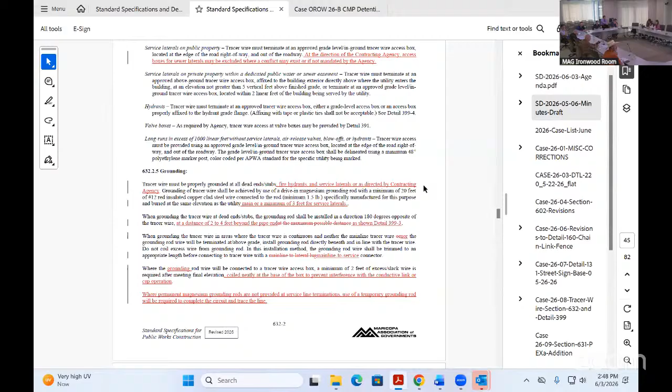The other main update was to the testing requirements. We added a definition of what continuity testing is, as opposed to line tracing testing. And as the spec stands right now, it requires full tracing of all the lines, but that could be a very large commitment depending on how big the project is. So we added a section, and it's on the very last page. Oh, perfect.

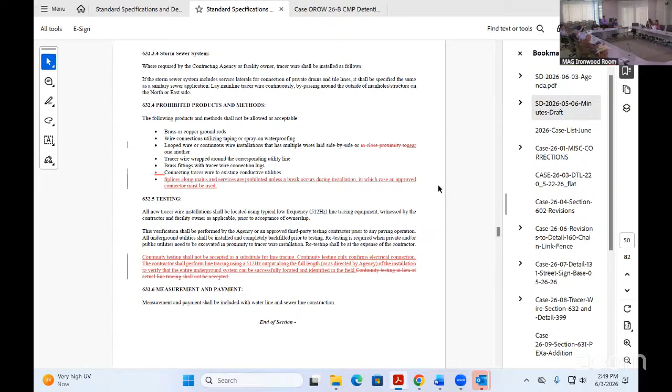So the second line down of that red: the contractor shall perform line trace testing along the full length or as directed by the agency. So you can opt to do 15% or whatever you choose to make sure that that tracer wire actually works. So we should have an update to the detail by the next meeting. We just weren't able to get it in for this one.

That is a lot. We tried to make updates depending on all the conversations that we've had in the working group. So trying to add a lot more flexibility is what we're hearing. Well, and I mean, just the case in general, to eat that elephant one bite at a time. We got the first case over, but could you imagine if we tried to incorporate all this over the past 2 years, we probably wouldn't have got over the finish line with anything. So I commend your guys' tenacity, that's for sure.

It is a bigger thing than we thought we were taking on, but we've just finished a project where we just did all the line tracing, the testing, and it was very successful. And we have the second phase of that project with a new contractor. So we're making some of these updates in-house and we're seeing how that can help. What was the feedback from the contracting side with all the tracer wire? Was their minds just blown that we're putting all this copper clad wire in the ground?

It was a lot. They haven't really had to do the testing portion of it before. So they could just put the wire in the ground and show that they've installed the wire and then they didn't have to test it. But we had them do 100% full tracing, and they had paved over everything before they tested. If they had just backfilled it, it wouldn't have been that much.

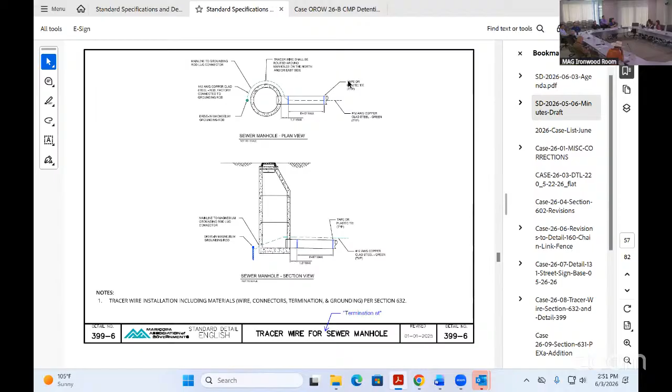Yeah, we gave them a heads up because the tracer wire hadn't been published yet in MAG. So we gave them all the details that this was going to be new. And so they incorporated it, but they weren't that familiar with it. So they're going through the growing pains with you guys on it. Yeah. It's a lot. But they were a good partner for us. Good. Keep them around another year. Thank you for those updates. Absolutely. If there's any questions, we're very open to feedback.

And we're still working. So open it up to committee members if they've had an opportunity to review, mark up, and give any feedback to this case. Oh, don't let me off that easy. It's the souvenirs. The working group is you. I'll give you a comment.

When you're doing CIP work or government work, government buildings, all that, that's one aspect of it because everybody can get things worked out. Then this thing spills over into the private sector and we get a big apartment complex or something and this gets shoved down our throat. It's not even funny. People don't realize how not funny this is, because it hasn't been well thought out before it was implemented. And so you're out there in the field going, well, my supplier doesn't even know what I'm supposed to buy. So this is good.

Oh yeah, we've heard it from all the sides. Yeah, can you feel the energy there? Oh yeah, I came in about a year ago.

And to Paul's point, with the capital improvement projects you generally have, or you'd like to hope you have, a true partner that you're contracting with, and you can work those things out, especially in a CMAR where you can get in front of it with the design engineer, which a large water line project should be a CMAR. But when you get into the land development, I could see where there's a lot of hurt feelings at the end of the day. We heard a lot about that.

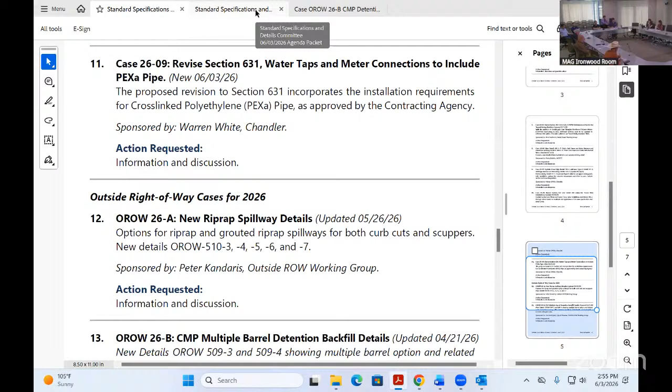All right, hearing none, we're gonna move into agenda item number 11, that's case 26-09, to revise section 631, water taps and meter connections, to include PEX A pipe, which is a cross-linked polyethylene pipe. This one is also brought by Chandler. You guys are busy over there. Want to provide an update?

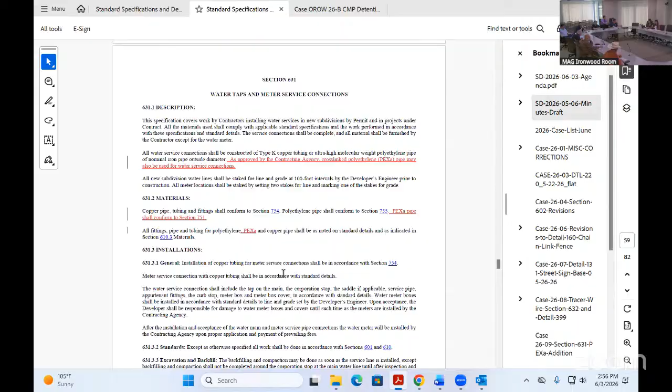Okay, are those the only updates? I believe so. The language itself remained the same? Yeah, Warren said we're just still working on it. I'll open it up to committee members for any questions or comments on this case.

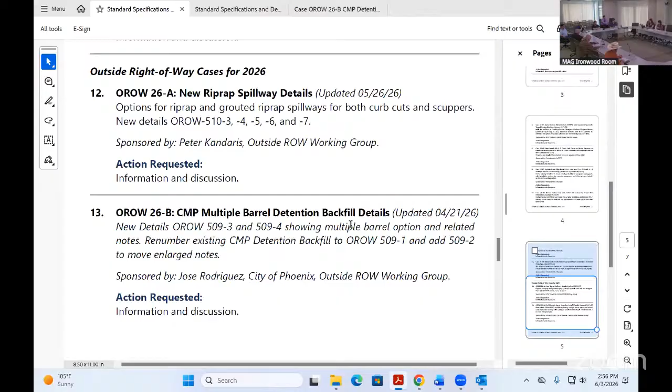All right, hearing none, we're going to move into outside right-of-way cases for 2026. Agenda item number 12. This is 26-A for new riprap spillway details. Peter, you want to provide an update? Thank you, Mr. Chairman. So we received comments from the last meeting and we worked on this during the working group. I'm going to preface it by saying the versions that you have here have the revisions discussed prior to this point, but there's a revision going on that we're going to have, cross your fingers, ready for next meeting, which is revision to section 220, which is the riprap specification.

And you'll see a presentation. I'll talk about that in a minute. A presentation was given to the working group on that. We had Wayne Cobank working on that extensively and trying to do an upgrade to it. Once he realized he had found a lot of new, revised information for riprap itself, we realized it's going to impact this case in particular, and I'll go into that in a minute.

So what we may end up doing is not necessarily putting this one on hold, but trying to get 220 going, because I have a feeling that we can't really do this case without having the revision to 220 done simultaneously. We'd be getting a bit of cart before the horse if we tried to do this without having 220 corrected. So with that said, these do include changes that have been discussed. The changes are noted in red. Primarily that was dealing with the bubbled items and the additional language, intended to identify how we'd meld this in with the revision to section 220.

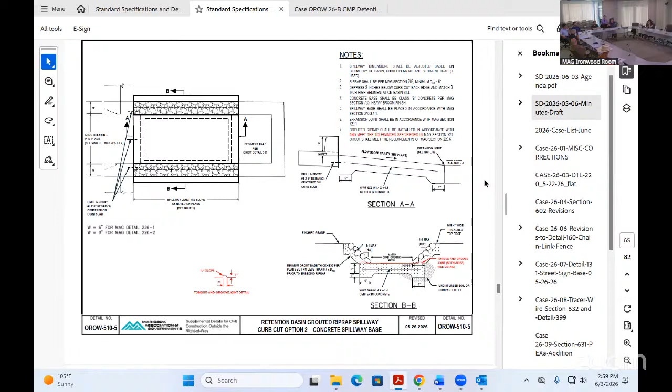So 220 changes are going to probably be more important than what we're doing right here, because until we get 220 worked out, I'm recommending to the committee that this probably be put on hold until we get that figured out. Then this falls right in with it. This also provides the cross sections for 220 that we don't have. This is a 2026 case, so there really wouldn't be a reason to withdraw the case. You don't need to withdraw it right now.

And our goal is for the July meeting to put the recommended revisions for 220 in. I think that'll be pretty quick. May or may not. We may have to push the whole thing to next year after we go through it. And again, we can talk about it here. Probably best to talk about it in the working group update, I would agree, or new cases, either one of the two, where that's going to influence it probably very directly.

I don't know, because these are fairly significant changes to how we do it, as opposed to here's riprap and you put it in the ground. Now we're talking about the various types. And Wayne went through and looked at very specific cases where he had photos of it. We had a whole presentation on it, which we could do when we have 220 brought forward. Likely it would be good to have the full presentation given to the committee so you can see the importance of it.

Well, I don't know if riprap has changed over time as far as the sizing and what's available now compared to what you're taking pictures of, 15, 20 years ago. Oh, no, these are new installations. Oh, okay. No, he was looking at new installations and not old stuff that's in the ground. He was actually showing construction installation photos. Gotcha. Which started the whole thing rolling.

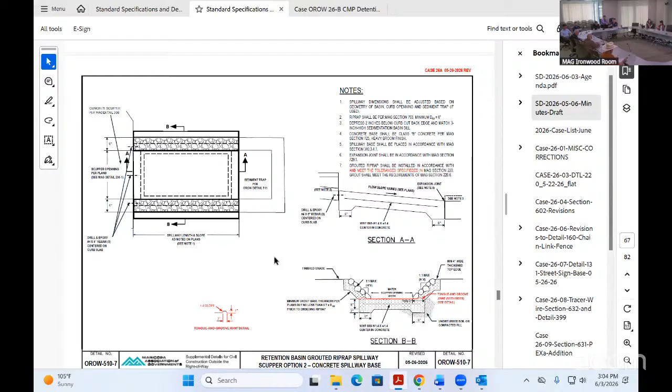All right, hearing no comments or questions? I got a couple questions ahead, real quick though. If they start working on 220, does it stay in the outside right of way? It's not out of right of way spec at that point. It's the 220. So then what committee does it go to? Well, it can be worked out. In my opinion, it could be sorted out in the outside of right of way working group, but the committee members are gonna vote on it. It would be a right of way publication.

Yeah, I'm just questioning because, as he said, we're circulating comments and I have got comments out to industry, and I'm getting a lot of pushback on the substantial changes that they're making, right? This is a lot. I mean, they're just saying, hey, does everybody know this isn't flying even yet? That's why we need comments coming back, and that's why I'm saying I gotta get industry involved. You asked about who's there from the cities. I gotta get industry involved who's doing this work that says this is a substantial change.

And the first thing we wanted to get fleshed out was, why do you guys see a substantial change in riprap? What things are you seeing out there right now? Have you got pictures and other things so we can address it? That's why we'd love to have some attendance; we were not getting contractor attendance. I know what you're saying and you're right, but I don't think it's addressing as much as it is standardizing. Is that fair to say?

Well, Peter, the comments I got where they want to hand seat, they want to dump the riprap and hand place any voids in there. No, it's that type, and if you're using this type, then you would do this. It's not dump riprap anymore. You're seating it with the pneumatic hammer, right? Oh yeah. And the placement, that's the question I had, that's why we need contractor involvement, because that was the main point that came out of our working group meeting: we need to run this by contractors, see how they're actually doing this stuff, because this isn't making a lot of sense at this point.

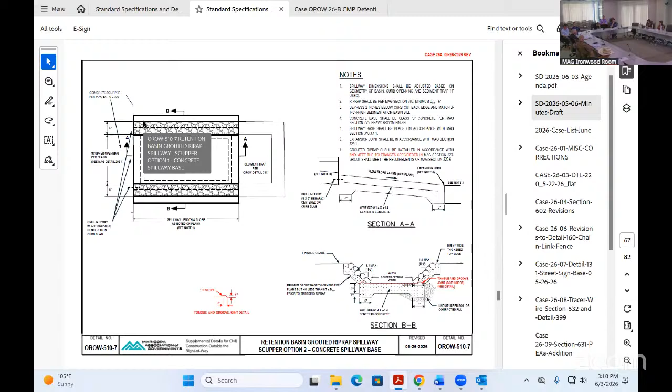Yeah, and here's the problem: we now find that what's being used in the field is not necessarily what's being specified in MAG. So it's called out in the plans. Yeah, I'm just looking at our MAG section 703. It actually defines riprap as angular.

Some of the issues we've had, and I think you've already discussed it, is in Scottsdale where we've got washes, the Indian Bend wash, and anything with a significant amount of water. If we don't have angular riprap, anything that's rounded, the water just rolls that stuff, and it ends up a maintenance issue for after-storm cleanup. So I think most of the rounded riprap's been used for grouted conditions.

That's what I've seen. I'm trying to remember what Wayne called that. I always think of it as river rock. Well, yes, rounded stuff, and not defining it as riprap. That's correct. It is river run and you'll see it a lot for armoring and plating, used in conjunction with the grout. And this is where Wayne had identified we're seeing a lot of different materials used, and the MAG specification is not covering significant amounts of those.

So we thought we need to upgrade 220 to match the material that's actually available and what's being placed out there. This is not meant that we have to get this resolved. If it comes down next month and we're not ready, I'll probably just withdraw the current case, put it back together later, and start working on 220 to get what agencies and contractors need, and get the right placements in there. I don't think there's a problem with that.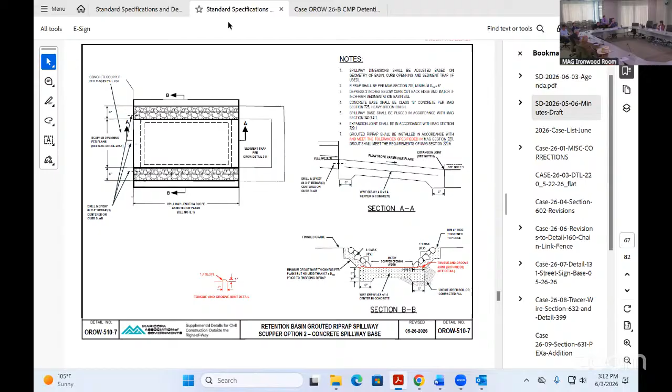Thanks. Two gentlemen over there working it out. You've got no dog in the fight anymore. I'm retired.

All right, let's move into outside right-of-way case 26-B, the multiple barrel detention backfill detail. Do you want to provide an update on that? Well, actually, that would be Jose. We had Miguel. Was Miguel still online?

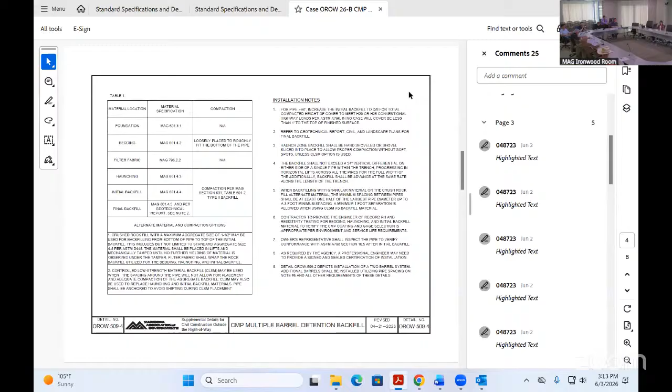Yeah, I'm still here. Are you able to provide an update on that case for Jose? Oh, was it for the scoring, correct? It would have been for the outside of right-of-way, 26, for the multiple barrel detention places. Okay, I'm sorry, no, that's fair enough. It was last updated on the 21st. So 2 months ago. So it's been a while.

So was it April 21st? That's what I have. Yeah, I got an update from Phoenix yesterday, which I posted on our website, and that's what I have up now. There's a revision for 6/2/26. I received this from their drafter directly since Jose is out. But essentially in this latest version there were some markups in these clouded areas that were received from Maricopa County, just clarifying the dimensions or some dimensions that had other rocks behind them or things that made it harder to read.

So I think this detail was basically just a final cleanup of the one from 4/21. I think the only changes were just cleaning up the look of it. Okay, so you're basically pulling those measurements out of that background. Yeah, making it easier to read, like the 1 inch minimum and so on. Makes sense. So really nothing else has changed since April 21st. Not that I am aware of. Okay. Did you know anything, Peter? Not that I've heard of, I've heard of no comments being received.

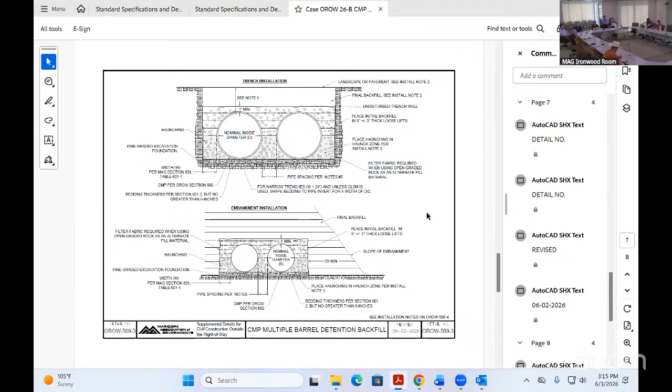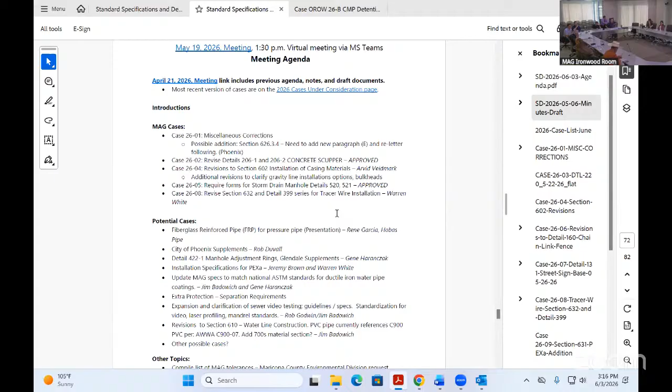All right, let's move into agenda item number 14, the working group reports. We'll start with the water sewer working group. Jim Badowich, do we have anybody that's substituting for Jim Badowich on the working group? Gordon, do you want this one? Yeah, a lot of the stuff were cases that were already discussed or approved. Some of the new ones that you can see that were under discussion were

FRP. They're looking at adding pressure pipe as one of the options to the new spec that was approved last year. The City of Phoenix is going through their supplements. Rob Duvall has identified some that, rather than updating their supplement, he wants to bring to MAG. One that was related to the water sewer group specifically was to remove water jetting, I believe, and there were maybe a few other small things.

The manhole rings, that's yours, Gene. I don't know if you've done anything on that recently. No, I meet with industry on Friday to discuss that. Hopefully after the meeting Friday, I'll have a draft for the working group to put eyes on. Okay, the next one is actually one of the new cases that was just discussed, the installation specs for PEX A pipe. So that was the newest case from the working group and Chandler.

Did you want to handle the next one? We had the presentation today on the ductile iron pipe coatings, so I think we've covered that already. Yep. Extra protection for separation requirements, that was just to float the City of Phoenix current supplement standards for identifying separation from other utilities, whether it's a dry utility or a main line or a lateral line. It was to float that across the working group to see if there was any interest in that.

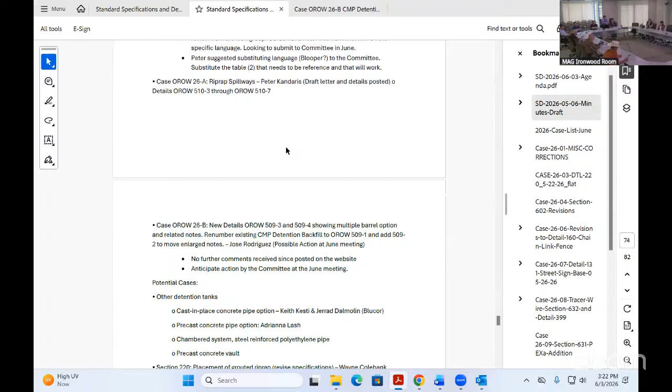Outside of working group reports, outside of right-of-way working group, Peter, you want to provide an update? Thank you, Mr. Chairman. We talked already about the miscellaneous correction or potential case one on the filter fabric. So going to that one, riprap spillways, we deferred. Looking down the list of other things, we did not have attendance to talk about the detention tank cases, so I think we deferred that to the next meeting also.

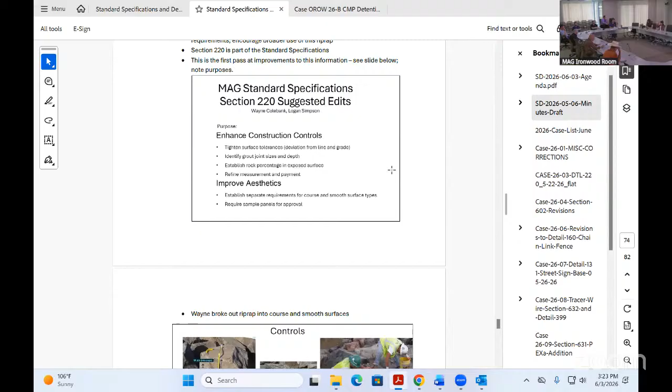So the majority of the meeting was, of course, taken up by our discussion, the presentation on the grouted riprap by Wayne Colebank. What he provided to us was a presentation on areas that he thought were deficient in the existing specs, or at least weren't mentioned sufficiently. And he did prepare a PowerPoint presentation, which is part of the package of the minutes that came in. Basically, he was looking at areas of enhanced construction controls, tighter tolerances, because he noted from observations and photos there were significant differences in those construction controls, identifying the size and depth of joints, how far apart even the riprap is being spaced.

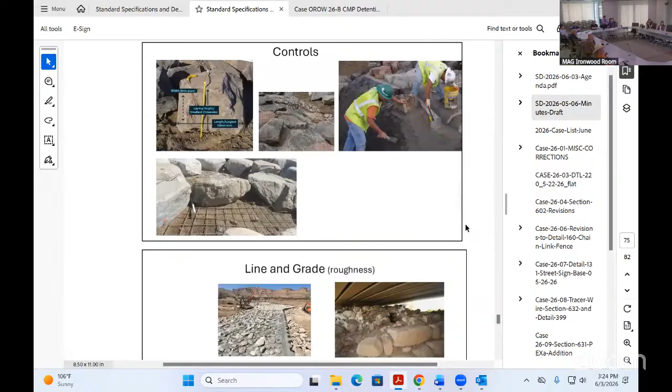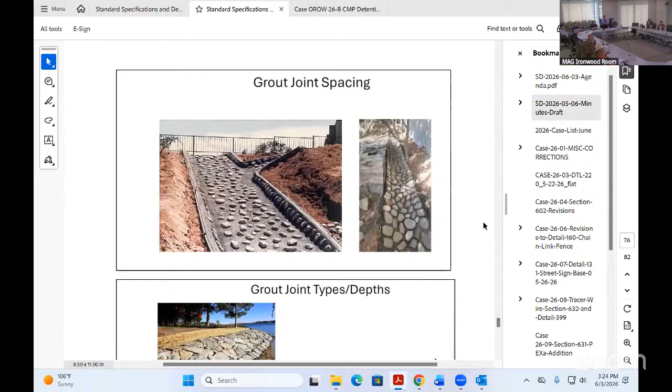You can see that the line and grade in and of itself was highly different between the different ones he was looking at. Line and grade is probably one of the more important ones, that you're meeting the grade that you want. Third, he called that roughness, for example. How rough do you want it? Maybe rough is good, or not good. The next one was the grouted joint spacing, which is not mentioned within the existing standards, how much spacing should be there. Should there be a type? How should it be done? The grouted joint types and depths, he also noted, could be very, very different.

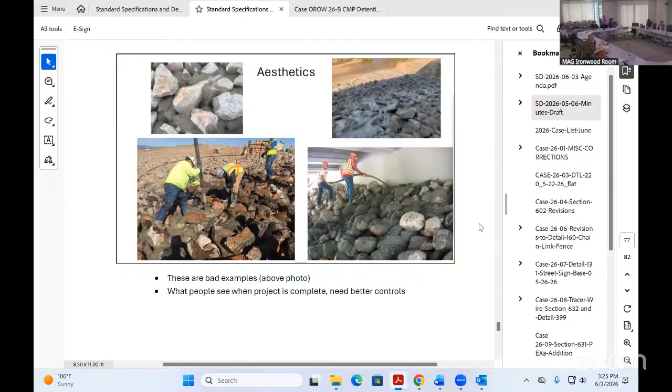He was just providing examples of what the different ones looked like in there. So as he went to address these, and then finally the aesthetics of what it looks like afterwards, where situations where there's grout just all over the top but nothing being cleaned, versus situations where you'd have the rock showing through. So these are the areas he was pointing out as needing to be addressed.

He had identified then potential putting conditions for a rough surface type of riprap placement, a smooth surface type of riprap placement. What will be the tolerances on those in particular? So after going through the deficiencies, we had a discussion on that. He suggested language that would be able to identify quantitatively some of that information.

Secondly, though, we talked about the concept of sample panels, and I don't think that's sufficiently addressed right now, or even addressed that much within MAG. And so we did talk about how that could be done, what would need to be accomplished with that. So, like I said, we had kind of an extended discussion on that, realizing at that time we need to get much more input from the construction world on what's actually being done. What are we looking at versus what really should be done?

Are we doing something that is falling within the purview of the municipalities, or are we talking about something that's more big ADOT type projects where we've gone outside of that boundary? So that's where I think we needed the reality check. And I think the discussion earlier is very good, where we need to probably get the construction world involved with what we're trying to put together here.

What he did put together was a list of suggestions. They were not meant to be final by any stretch. So some of these suggestions may need to be completely stricken out. I think the most important thing is we need to get hammered down what are the materials that are available, and how can those be placed and still get something that the agencies can specify, and we don't have something that's nebulous out there towards opinions.

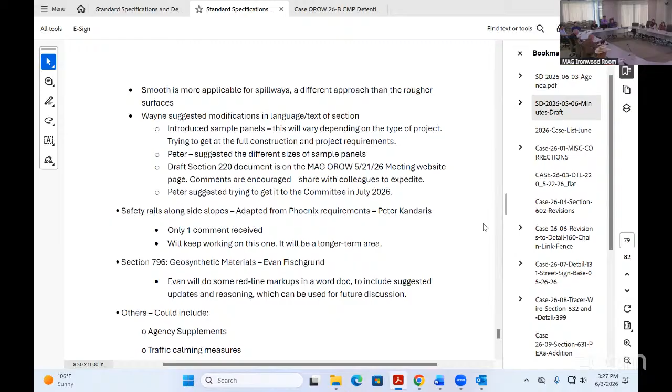And section 796, Evan Fischgrund, again, landscape architects, looking at doing a markup to our existing geosynthetics. That's been something we've needed for quite a while. It's one of those orphan specs that gets kind of forgotten about. So he's taken it upon himself and will present to the committee his recommendations for updating and modernizing 796. That was the end of the meeting. We will meet next time on June 18th and continue discussions.

Thank you, Peter. Asphalt Materials Concrete Working Group. I didn't see Alex, but I think Hunter was on. Check, check. You guys hear me? Mr. Garrison, we hear you loud and clear. You want to provide an update?

Awesome. Yeah. So forgive me, I wasn't at the last working group meeting, but I did get some updates from Alex, and it looks like City of Phoenix is going to be putting forward some proposed MAG updates for 2027. So it looks like they're moving forward on a few items. Just to circle back on, and forgive me, I'm not the asphalt guy, but I used to test it a lot. But for section 710, we have 2 task forces.

This may be redundant from last week's update, but basically we're splitting it up into a gradation task force and a binder task force to really just get down in the dirt, because we really want to get this done. The initial task force meetings are scheduled for the 12th of next week. Yeah, so it's coming up for the task group meetings on the 12th. So we're really looking forward. I forget the deadline for this, but I know it's coming up really soon, and we're just trying to get through that.

Other than that, there's just some proposed changes to reducing the optimum moisture requirement from 3% to 2%. Just little things like that. So if there's any questions for me, feel free to chime in. Yeah, thank you for the informational update, Hunter. I appreciate that. Yeah, sorry, I'm reading off some notes that I just pulled together real quick.

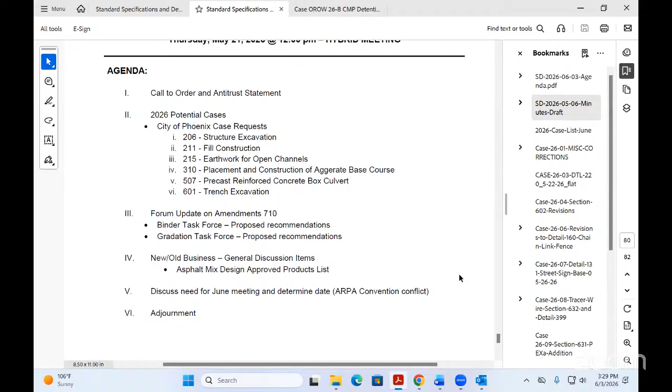All right, we're going to move into the ADA working group. That was with Warren and Jose. Do we have any other representative that wants to provide an update?

I'm not at these working groups, so I don't have any real knowledge of that. We have a representative there from Glendale, but he's not here today. Okay. Chair, I did attend that meeting as well. We've already talked about the street sign details, so that was one of the things that was discussed quite a bit during the meeting.

Warren's also been working on the street parking detail. The sign detail kind of came out of that detail because he had signs on that one and realized we needed to update the sign, but I think he's hoping to get the street parking detail out this year. So maybe by next month, hopefully.

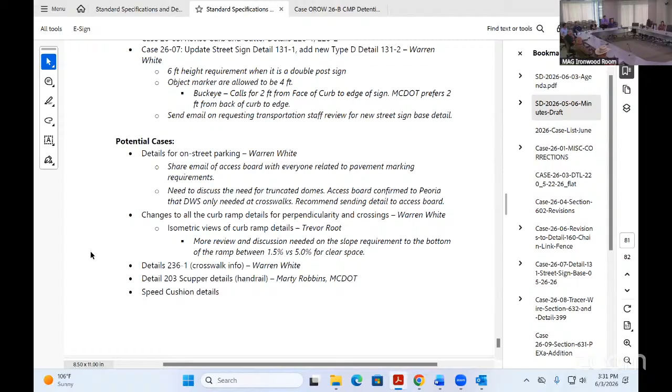And then continuing to work on different curb ramp details and the isometric ones for the, I lost the word. For the non-pedestrian crossing? No, there is for the pedestrian cross. It's the directional ramps. That's the word I was thinking of. To make them easier to understand, and so that's the main things that were discussed in the last meeting. And I believe the next meeting is scheduled for June 18th, 2:30 p.m. All right, thank you for the update, Gordon.

Moving into agenda item number 15, potential cases for 2026. I just would like to reach out to everybody and let you know that July is the final month if we're going to bring a case forward. We usually run till September. We'll have a meeting in September, and we generally try not to have one in October unless we have to get something across the finish line that's really pending, and I don't see a need for that at this current time. But for potential cases, anybody have anything they'd like to bring up today?

As was just touched on in the working group reports, I believe Phoenix is going to try and get their case in for the supplements that they want in MAG in July. And also the section 710, I think one of the reasons they're trying to get those working groups done early this month is they're hoping to get a version of 710 in by July as well. Wow. Okay, thank you, Gordon. Well, moving into agenda item number 16, the staff report.

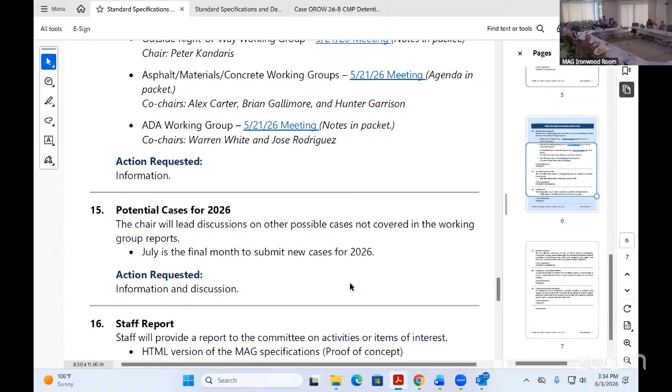All right, moving into agenda item number 18, requests for future agenda items. Any requests from committee members, Paul? I would like to see if we could get the agenda items lowered to maybe about 15. Okay, we'll take that into consideration. Anybody else? All right, thank you. And then agenda item 19, comments from the committee. I guess this is where we don't take any action on anything also. Just more of a summary, any kind of notice from any other municipalities or any other members that they want to share with us?